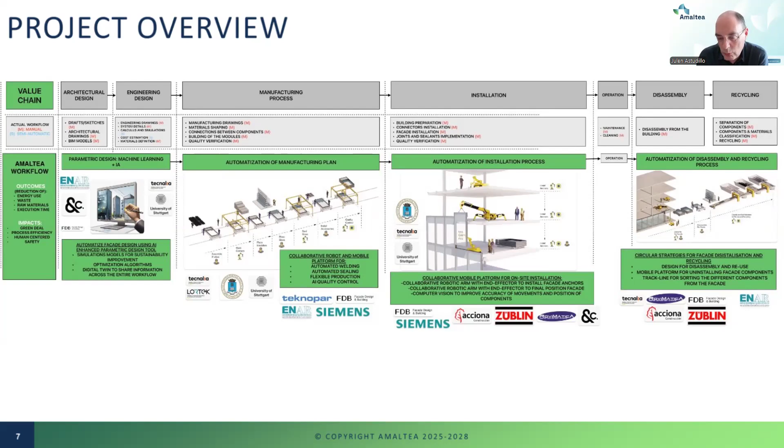You can see also in the picture the companies of the project and where they are going to work, but we will explain this part later. Next slide. Okay.

Thank you, Julian. Good morning again. I'm Anca Marin, a project manager with Funding Box. And just very briefly, after this overview of the project from the project coordinator, Julian from TECNALIA, I want to emphasize the main objectives of this info day, which is a bit sooner than the open call launching. But we really wanted you to get a big preview of what's coming in August, and we really count on your insights in order for us to optimize and make this open call very understandable and reachable for you.

So the main objectives today are, next slide please Agnieszka, for you to get an understanding of the project methodology, as briefly explained by Julian just now, for you to see the connection between the digital tools employed by the project consortium in this AMALTEA strategy, to understand the digital tools being employed within the project and how these digital tools relate to the pilots that we have in the project and the challenges that we are launching for you, the third parties, the companies external to the project consortium, to work with both the tools and within the pilots. So we are trying to give you this entire image of how everything works together to create the AMALTEA ecosystem: the project partners, the technologies of the project, the methodology, the pilot, and your solutions.

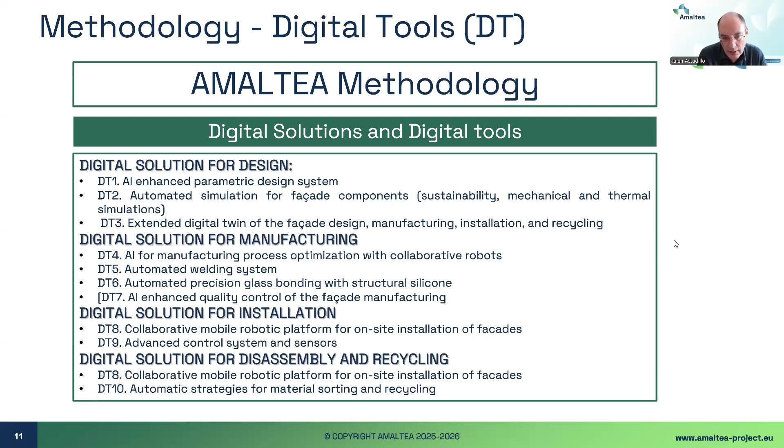Based on these digital tools and digital solutions, we have proposed these 8 challenges, which we are now going to describe in more detail. What you need to do is understand the challenge and the proposal, and if you can propose something to address the challenge, you can apply to the open call.

Now we are going to explain the challenges one by one. You will have this information available later, so it's not necessary to copy all of it down. Now my colleague Alex will explain the first one.

Hello, thank you Julian, and good morning everyone. My name is Alex Padró from the TECNALIA Artificial Intelligence team, and I am here to share with you the first challenge of this info day.

As you can see on the slide, this first challenge is focused on data management and interoperability. We have divided the challenge into 5 different points: to know about the problem, how we need to solve it, how we can test it, and how we can measure it, among others.

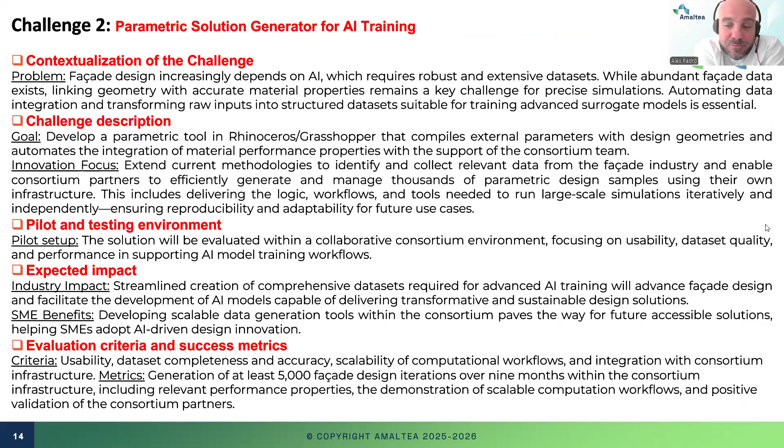Thank you, Alex. Hello everyone, my name is Markus Renner. I'm Research Associate at the Institute for Computational Design and Construction at the University of Stuttgart. Today I have the pleasure to introduce the second challenge, called Parametric Solution Generator for AI Training.

In order to enable facade design optimization using AI surrogate models, a comprehensive and well-structured dataset is a prerequisite. Facade design is becoming more AI-driven, but a major challenge remains: while there's a lot of data available, the connection between design geometry and accurate material performance properties is still weak. This link is essential for reliable simulations and effective AI training.

So coming to the challenge description, the goal is to develop a parametric tool in Rhino Grasshopper that automates the integration of external parameters such as climate, location, and panel configuration based on building position with design geometries and material data. The innovation lies in expanding current methods to support large-scale sample generation within the consortium's own infrastructure, including delivering tools and workflows that allow iterative, reproducible, and scalable simulation runs.

The solution will be tested in a collaborative environment across the consortium. The focus will be on usability, data quality, and how well the tool supports the AI training workflows. From an industry perspective, the challenge will streamline the dataset creation process, enabling more advanced and sustainable AI-powered facade designs. We'll evaluate the solution based on usability, data completeness and accuracy, scalability of workflows, and compatibility with the consortium systems.

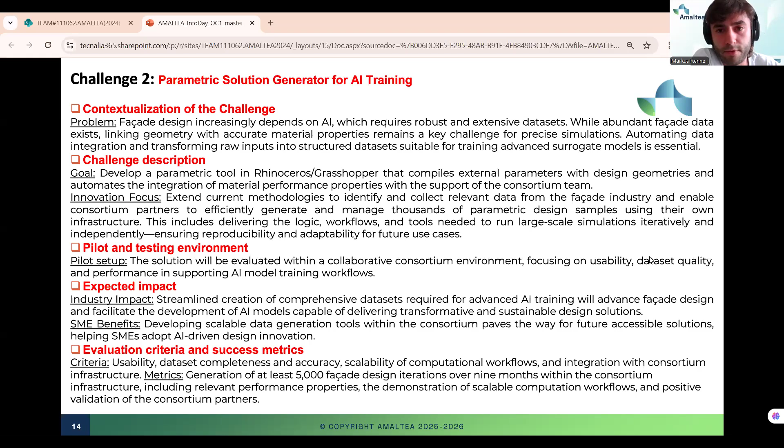And the success will be measured by generating at least 5,000 facade design iterations, each with performance data, over a 9-month period. If there are no questions, then next slide please.

So let's move on to the third challenge: web-based graphical user interface for design decisions, platform-independent accessibility. So to enable effective use of AI in facade design, it is not enough to generate optimized results. We also need to make those results understandable and actionable for designers.

The problem we are addressing is that AMALTEA already uses powerful multi-objective optimization and surrogate models to generate these design alternatives, but the complexity of these datasets can overwhelm users, especially non-experts. This limits the ability to balance aesthetics, performance, and sustainability in the early stage design.

The goal of this challenge is to develop a web-based, platform-independent graphical user interface that makes AMALTEA's outputs interactive, intuitive, and accessible from any browser. So the innovation focus is twofold.

First, the visualization: the GUI should allow users to explore simulation results using tools like Pareto fronts and parallel coordinates plots. Second, AI-powered support: a retrieval augmented generation system will provide relevant data, similar past designs, and contextualized suggestions based on user queries, essentially turning raw data into usable insights.

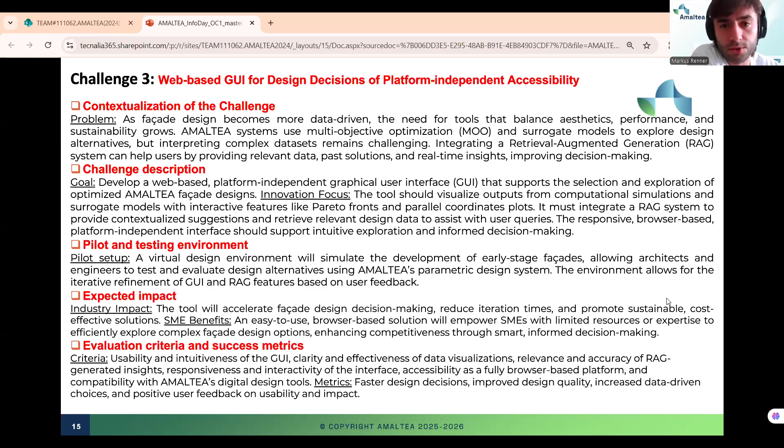So in short, this challenge aims to bring the power of AMALTEA's optimization to users in a form they can actually engage with efficiently and intuitively. Thank you, next slide please.

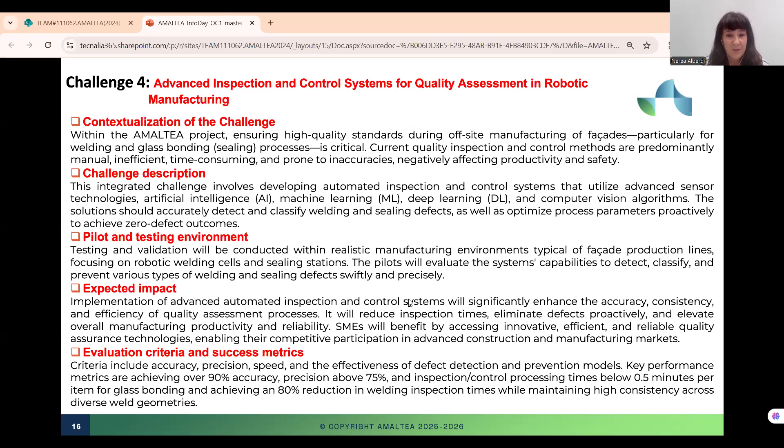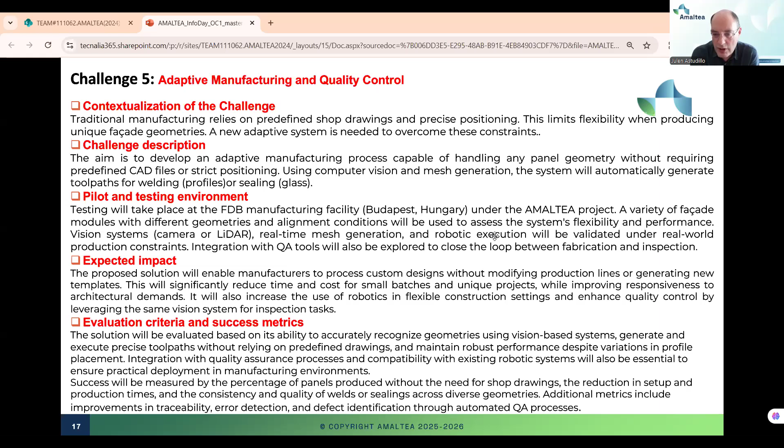Okay, at the end, it will be measured. We will measure depending on the amount of panels that are produced without the need for shop drawings, and also the reduction in time and in the entire process. This is more or less the idea that you will understand better once we see the description of the pilot.

Hello, I'm Eduardo Chamorro, part of TECNALIA's team of Materials and Industrialized Systems.

Here we are presenting two challenges that are closely interrelated: challenge 6 and 7. They will work as a unified solution for the construction pilot sites, related to the robotic platform and how it allocates and installs the facade panel on the construction site.

Challenge 6 focuses on the fact that construction environments are messy and irregular, far from the clean and controlled spaces where most robots are used to work. Our robot needs to see and understand the construction site, likely on a second or third floor, using 3D lidars, stereo depth cameras, a total station, and a reference prism to locate itself.

We are looking for a real-time sensor fusion solution that can combine all this data into a single high-quality 3D point cloud with higher and lower densities in certain areas, depending on where we want to focus the action, all while the robot is in motion. This point cloud should reflect the environment with high detail and accuracy, and also implement segmentation masking algorithms to help the robot recognize supports or panels where the facade panel will be anchored, as well as visual markers such as AprilTags.

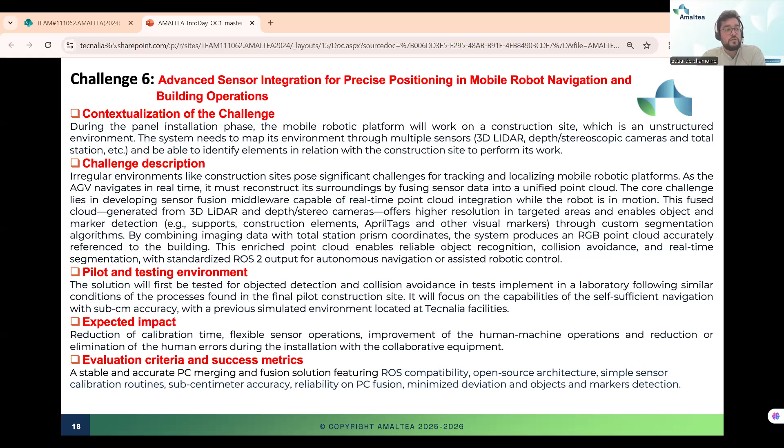On the other hand, challenge 7 — please, Anka. In this challenge we're talking about autonomous navigation of intelligent machines that can navigate through unpredictable spaces where there are no fixed landmarks, no GPS signals, and definitely no clean lines or straight paths of motion for these AGV platforms.

Right now, most 3D navigation systems can't really cope with this kind of setting — they are too limited or not precise enough to navigate unstructured environments. That means they struggle to move safely and independently, especially when human operations are involved nearby.

We are calling for solutions that can deliver advanced 3D localization with live point cloud creation for navigation. As mentioned, ideally challenges 6 and 7 will be further integrated, but we split them between the higher, more refined point cloud focus and the one that focuses more on navigation — this is challenge 7. We want something that builds a live, up-to-date 3D map of the environment and guides the robot in real time.

This includes path planning, detecting obstacles, and avoiding collisions, all on the fly. This solution should combine smart sensors and predictive AI navigation for dynamic positioning of the platform in unstructured spaces. We want a human-machine interface that is friendly, runs directly from the robotic servers, and can be easily deployed to interface with the robotic platform we plan to use for the pilot site.

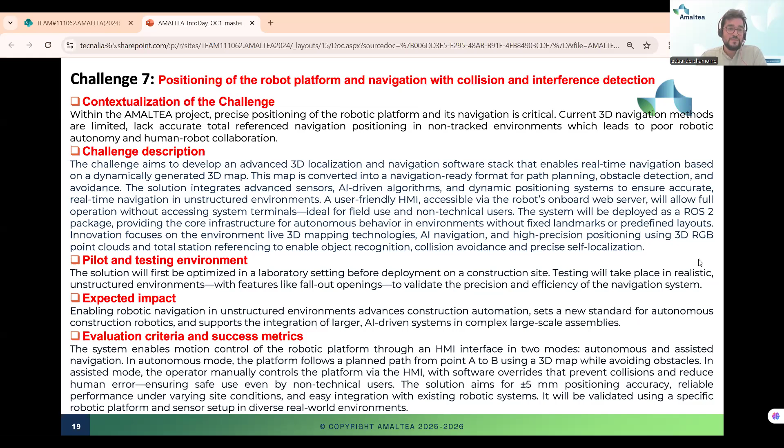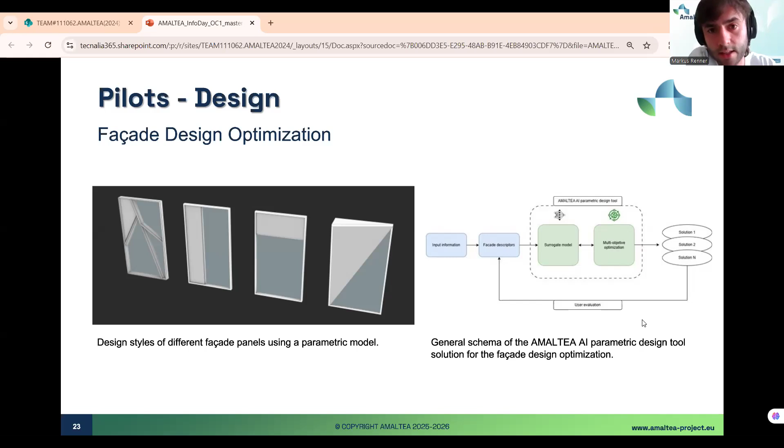Next slide, please. Pilot 1 explores how AI and digital twin technologies can enhance and streamline the early stages of facade design. The process starts with inputting key constraints like aesthetic goals, energy targets, and construction requirements into the parametric model. From there, the AI optimization engine runs thousands of permutations, applying embedded simulation modules, evaluating thermal, structural, environmental, and cost performance.

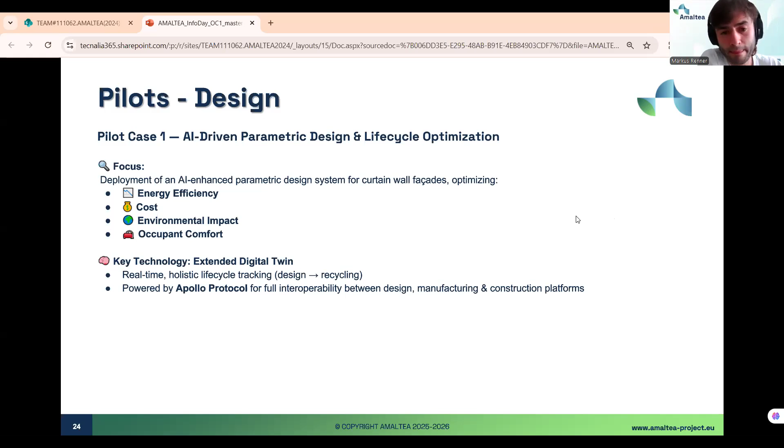All this is dynamically captured by the extended digital twin, which acts as a living data container, linking each design option to materials, lifecycle data, and manufacturing logic. With the Apollo protocol or a similar integration standard, the data flows smoothly between design, manufacturing, and construction systems, ensuring interoperability and traceability. Next slide, please.

The overarching goal of Pilot 1 is to build an AI-augmented design platform that links sustainability goals with efficiency and usability. The system integrates surrogate modeling techniques, fast approximations that reduce simulation time, and multi-objective optimization algorithms that evaluate trade-offs like cost versus comfort or material usage versus carbon footprint, for example.

This allows design teams to explore a wide range of viable solutions automatically and with more confidence in the data behind each one. Ultimately, the aim is to accelerate sustainable design without sacrificing depth, detail, or regulatory compliance.

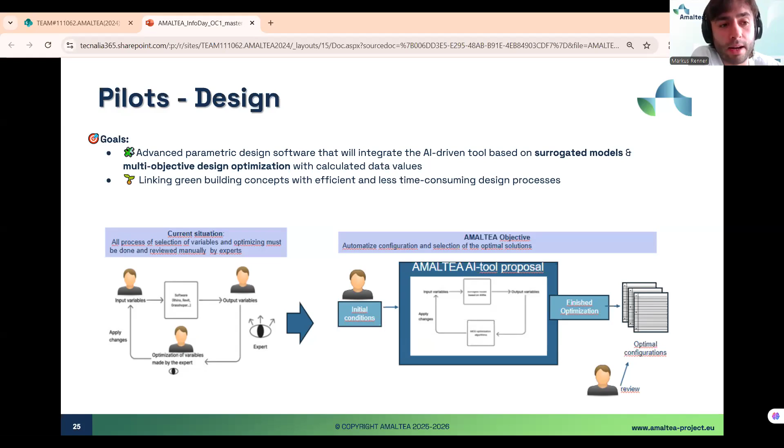Next slide, please. So we're using this pilot to evaluate not just technical performance, but also usability, interoperability, and impact. That includes how well the AI tool generates feasible, high-performing facades, reduces time and effort, supports multi-objective exploration, and integrates with downstream systems like BIM and manufacturing tools.

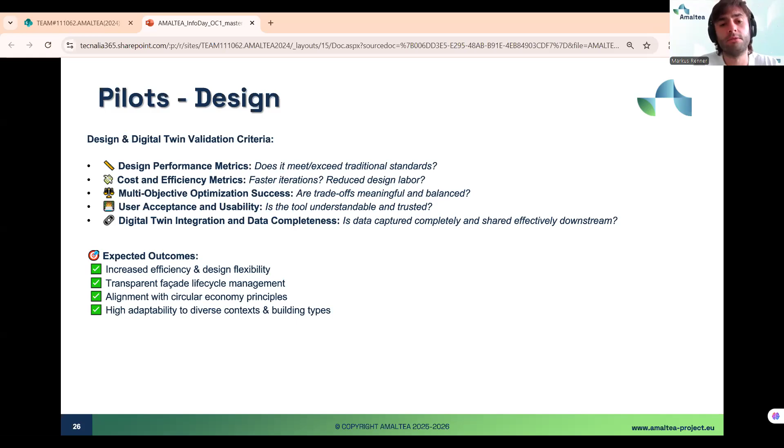Lastly, the design pilot is about proving that the system enables smarter, faster design, drives transparency across the lifecycle, and supports adaptable, sustainable architecture aligned with circular economic goals. Next slide, please.

I think you passed one slide, Agnieszka, the previous one. Yes, now we are going to talk about the manufacturing pilot.

So the idea is to improve the manufacturing line of the curtain wall facade process. FDB facilities are located in Budapest, Hungary. As commented before, we are going to be able to make some tests in the laboratories of the different partners of the consortium, but the idea, at the end of the project, so we're talking 2.5 years from now, is to have this manufacturing line working with the activities developed in the project in some specific points of the curtain wall manufacturing process.

The idea is to transition to semi-automated and artificial intelligence supported manufacturing, taking into account that at this moment, apart from some Japanese and Chinese companies, the manufacturing of facade modules is being done mainly manual.

So you have a manufacturing line similar to the one of a car. It's a linear manufacturing, but as the processes are quite complex and quite different, we are not talking about producing 1 million cars. We are talking about producing 500 modules of facade, or 300, or 200, or 1,000. So we are not talking about a big amount of components.

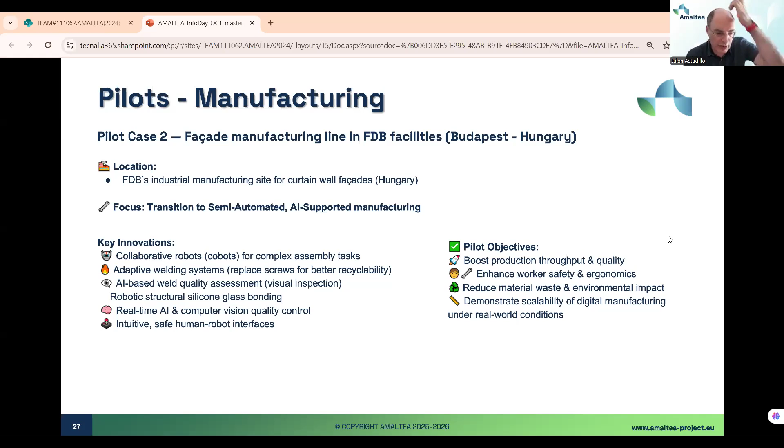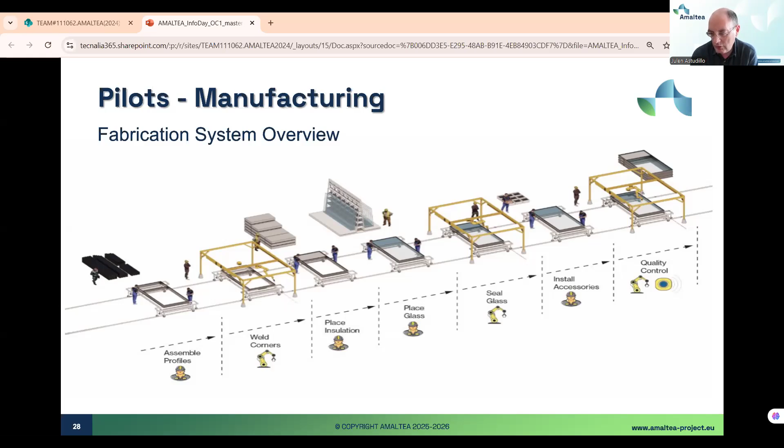Good morning everyone, my name is Álvaro Flores, I'm the R&D director at Robomatica. Now that you've been introduced to the project overview, the challenge, and the first 2 pilots, I will provide more context about AMALTEA's installation work package, which aims to change how we build Europe through robotic installation of facade panels.

This will include pilots 3 and 4. But first, let me introduce the technical team involved in this mission. It has been mentioned before, but I'd like to go a bit deeper. This includes TECNALIA, the Polytechnic University of Madrid, the University of Stuttgart, Siemens, Envolventes Arquitectónicas, Tecnopar Solution, and us, Robomatica.

In addition, we are not developing the technology in isolation. We are working with 2 industry partners with whom we will test our innovations in real conditions: Acciona, a global leader in sustainable infrastructure and renewable energy projects, which brings practical experience from complex construction projects, and Züblin, known for excellence in construction and engineering services, which will provide the quality standards and precision that define modern European construction. These partners provide essential real-world validation to ensure our innovation works in practice.

Now let me paint the picture of the challenge we are solving. Imagine a construction worker suspended high above the ground, manually positioning heavy facade panels in wind and weather. Every movement carries risk, every measurement must be perfect, and every installation takes precious time. The challenge we are addressing in this work package is transforming this dangerous and sometimes inefficient process through robotic installation of the facade panels.

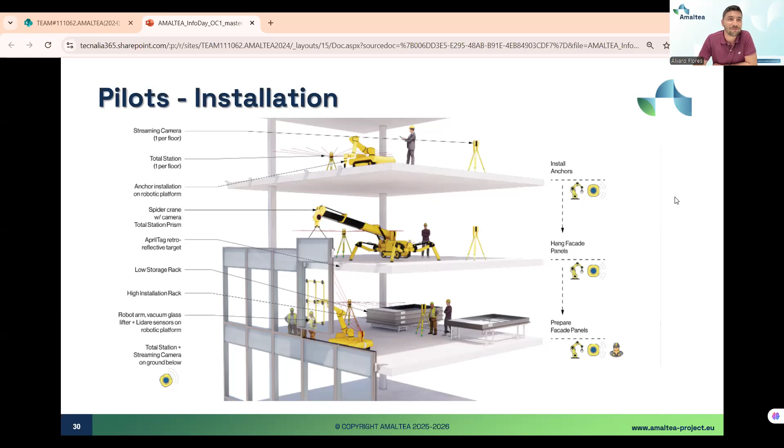Okay, and the last pilot is related to dismantling and recycling. So the idea, which we are going to see later in the scheme, is how we can make use of the approach from the previous pilot, using robotic and automatic platforms in order to uninstall the facade modules. So how we can improve this process of reusing a facade that is no longer used in a building.

So the idea, we can see here 4 steps: which is the material condition that we have in some building. So the idea is to automate the inspection using different sensors after the removal of the facade to see which is the status. This is something that can be reused, or at the end we need to recycle it, and which can be the characteristics of the material in order to follow one of these two paths.

The idea is to obtain real-time conditions about the status of the different components, collect this information, and use it with these new artificial intelligence tools in order to improve the entire process. In relation to the reuse and recycling framework, the idea is to use some of these tools, but also we need to combine them with expert validation.

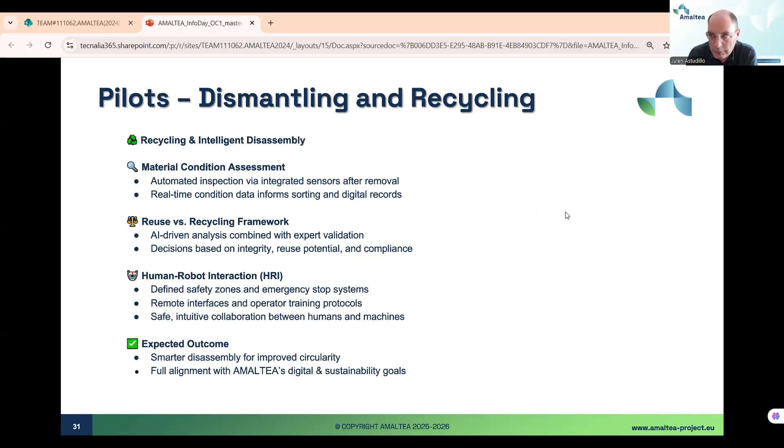Here you can see the scheme of the process that we have in the proposal phase. The idea is to dismantle the facade using the same process we used to install it. Obviously this is the approach we are going to have in the project. Probably in real scenarios we are going to make some differences to this process depending on the conditions of the building and the possibilities we have to include this type of systems. Then we are going to have a part where the human enters the disassembly of the different panels.

One good thing we have in this project is that we chose a product that is semi-industrialized. We are talking about glass, aluminium, steel, gaskets, silicone, polyamides - these type of materials. We are not talking about concrete, bricks, gypsum, these type of components that are sometimes more complicated to evaluate. So more or less, apart from the glass, almost all the components maintain their characteristics during the process, and are materials that behave quite well in terms of time in the buildings where they have been placed.

The idea, once we have the components disassembled, is to classify and sort the materials. Here we are going to have some additional developments that some partners have in relation to how we can classify these materials in a semi-automatic way. There is a product that TECNALIA has, called Tracia, that is used to classify different materials.

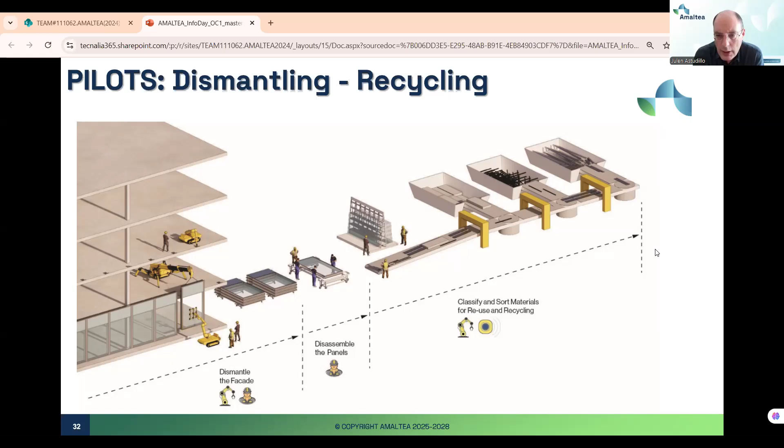So more or less, this is the final pilot, or complementary pilot, that we have for the activities we are going to do in the other three pilots that have been commented. And now, Anca, I think we are going to talk a little more about the structure of the open calls.

Yes, we are. Thank you, Julian. Thank you, everyone, for your contributions. And we hope you got a bit of understanding about the challenges and the pilots and the digital tools of AMALTEA.

Now, regarding the first open call that we are preparing for the 20th of August to launch this summer, towards the end of the summer. AMALTEA has a budget of 4 million euros to distribute to third parties. For the first open call, we are looking to select up to 10 companies, SMEs and startups from Europe and associated countries to Horizon Europe to join our support program.

The first call will include a mix of both software and hardware solutions, and the maximum funding will be up to 100,000 euros for software solutions, while for the hardware solutions, the selected companies will get up to 200,000 euros to deploy and test their solutions within the AMALTEA pilots.

So as you can see here, a sketch of the timeline with respect to the open call launching on the 20th of August. We have organized this info day prior to that in order to have this opportunity to share the technical parts of the project with all of you. We'll share contact details, so if you have other questions, comments, or suggestions, or something is unclear for you at this point, we'd actually benefit from your input, your feedback today, so that we can make it clearer in the documents, in the open call documents.

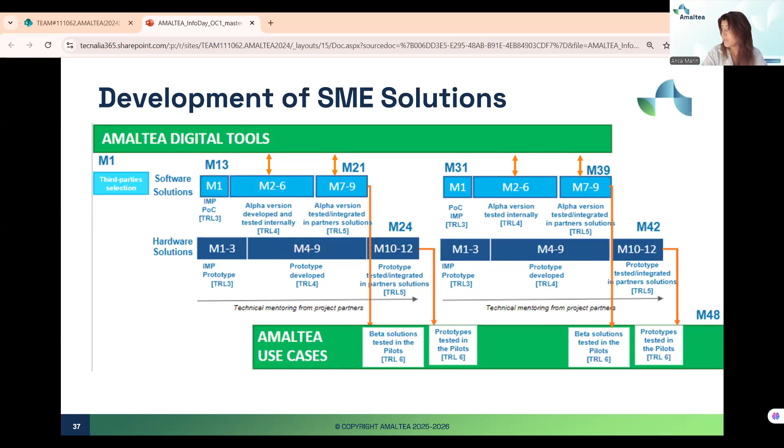Regarding the eligibility of applicants, I've mentioned we are looking for a total of 25 SMEs in 2 open calls. For the first open call, we are focusing on selecting 10 SMEs. They can also include startups. They have to be registered. I believe some of you are familiar with cascade funding with financial support to third parties, so the conditions are to be registered as a small or medium enterprise or startup in EU member states or Horizon Europe associated countries.

Now that you have an understanding of the digital tools of AMALTEA, you can understand whether there is a technical alignment between the technologies you are offering as a technical company and the digital toolbox from AMALTEA.

There is another condition included from the European Commission topic, which is the capacity to co-finance 30% of the project. That means that for maximum financing of 100,000 euros, for example, the total budget of the project should be around 140,000 euros. So we are working with a lump sum mechanism.

This means you do not have to provide documentation regarding expenses. We do not ask for timesheets, contracts, or invoices. Payments are made against deliverables, but it's important to consider that for maximum funding, the total budget has to be co-financed with 30% by yourselves.